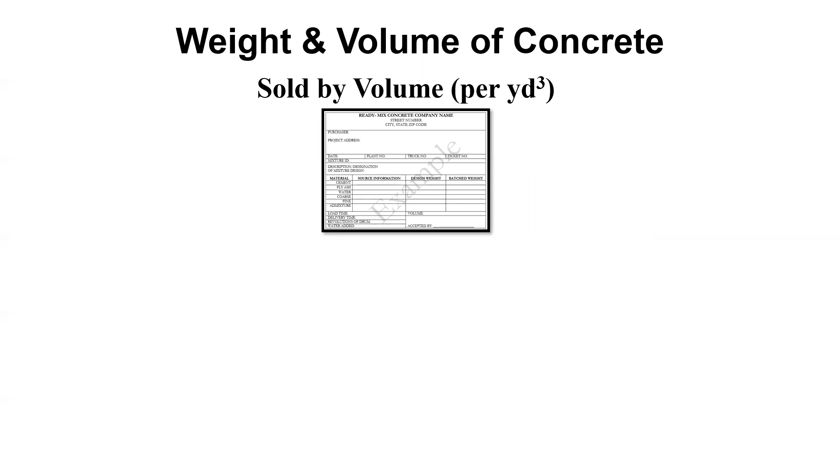Well, you got to remember, concrete is sold by volume. When you estimate in your estimating class, a lot of you are in Dr. Yates's estimating class, so you're estimating concrete by volume, cubic yard. So contractors, whenever you're going out and building something, you're going to figure out how much volume it is to fill up in your forms. So the concrete truck comes out, it's a certain volume, pour it out.

Well, whenever that ready mix truck, though, it's batched sometimes by weight. Some of the liquids are usually batched by volume, though. So they have to do a little conversion back and forth just to get the weights right. But at the same time, you got to figure out when you're batching stuff by the weight, what's the volume? Because your end goal is you want

to have enough to yield for your volume that you're looking for. So if you have a 10-yard truck, you want to make sure you have 10 yards you're selling that customer, not 10 1/4, not 9 1/4. You want 10 yards. And so what you do whenever you're designing a mix is you start off by saying, okay, we're going to design based off 1 cubic yard. And then if we want to make it into 10 yards for a 10-yard truck or 8-yard truck, then we can just times that by 10 yards or 8 yards, depending on what you want.

And so if we're doing trial batching, when it's 1 cubic yard, we can even convert it into 27 cubic feet and then take it down to maybe 2 cubic foot whenever you do trial batches at the lab. We'll go through some of that too. So there's some math that starts getting involved with designing. It's sold by volume, it's batched by weight or volume, and then usually you want to design it by volume, but you have to have both the batch weights and the actual volume for your design.

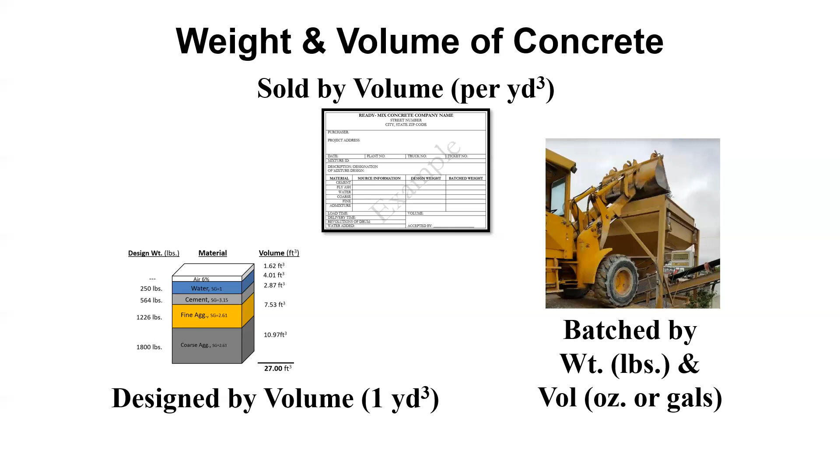But your goal is you're trying to design 27 cubic feet or 1 yard. So like I talked about, think about a 3 foot by 3 foot by 3 foot box. That equals 27 cubic feet, 3 times 3 times 3. And then that's 1 yard.

So in that 3 foot by 3 foot by 3 foot box, we're going to figure out how much aggregate, how much coarse sand or coarse aggregate, how much fine aggregate, how much water, how much cement, and how much air all gets put in that little box. So that's what our goal is when we're designing. We're trying to figure out how much to fill up that box with.

So if we're trying to figure out the volume, and we know our batch weights, and we know the specific gravity of the material, and we know the unit weight of water, 62.4, then we can convert, we can know the volume. And we can also do basic algebra, take this denominator here, move it over there if we want to figure out if you know the volume, to figure out our batch weight. So, I mean, you can do basic algebra that you learned in probably the 8th, 9th grade to go back and forth.

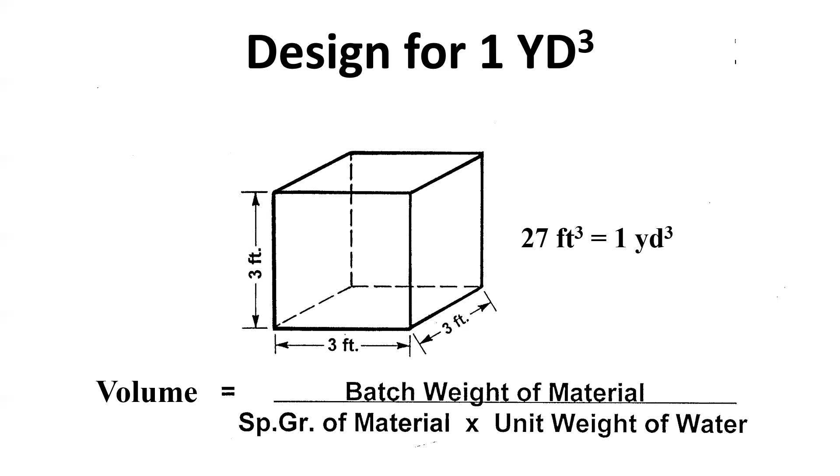So we're trying to fill our box. If you remember specific gravity like we talked about right before class, it is a comparison of density. If you have the weight at the same volume, and you compare the weight of water to the weight of stone, how they get 2.7 is the ratio. 270 pounds of stone divided by 100 pounds of water is 2.7. That's how they get that. You get the unit weight by just putting the material in a known volume and weighing it, so pounds per cubic foot.

Absorption, we've run absorption, we've run unit weight in the lab, or at least talked about it, and tried to figure out absorption at SSD. So whenever the voids are fully saturated, but there's no free water, so there's nothing on the surface.

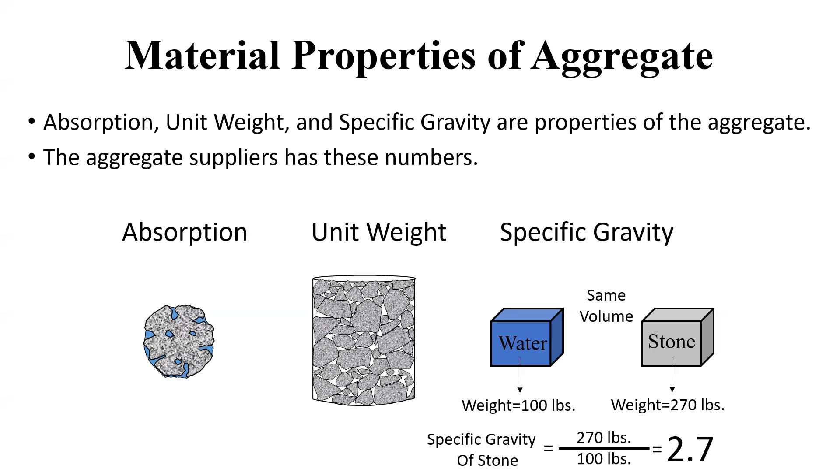So let's go through a basic example on the board or on the PowerPoint. How many cubic feet will 5 bags of Portland cement occupy in our little box here? 470 pounds divided by 196.56 is 2.39. I probably should have put this a little better, but what is the specific gravity of cement?

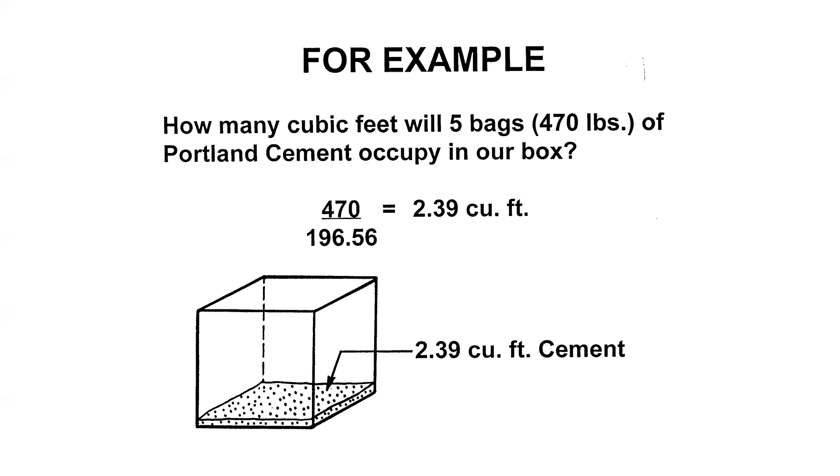It is 3.15. So 3.15 times 62.4 is 196.56. That's how they get the bottom number. The top one is just given. So you do that together, and that equals 2.39 cubic feet.

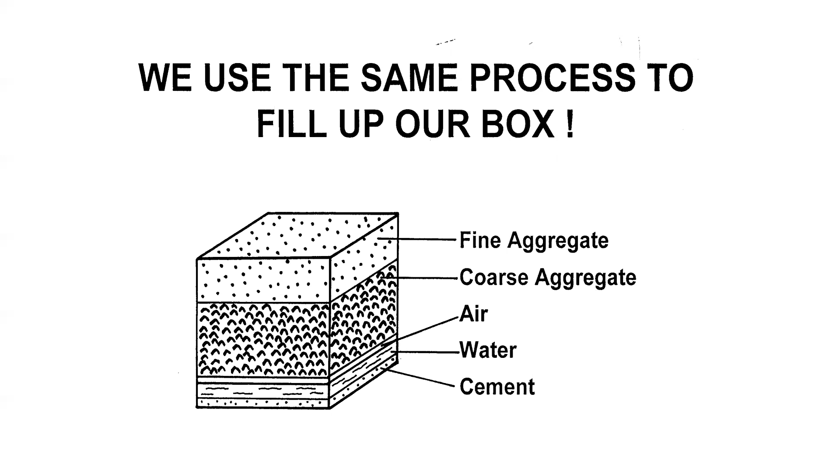So you do the same thing through the process, except for air, and we'll talk about air here in a minute. But you figure out what your specific gravities are for each of your materials, and if you know your weights, you can convert to a volume.

So if this is our example, you have the graph or the worksheet in front of you for people online. This is the worksheet that I think I have attached in the lesson. We have our weights, so we have a given weight of cement and the specific gravities of it, and it goes all the way down. So if you fill out your boxes from that worksheet, weights are on top, on the numerator, and the specific gravities are on the denominator on that box.

Okay, so wait for a second while you fill it all out. And then when we get to air, it is 6%, and it's times 27.

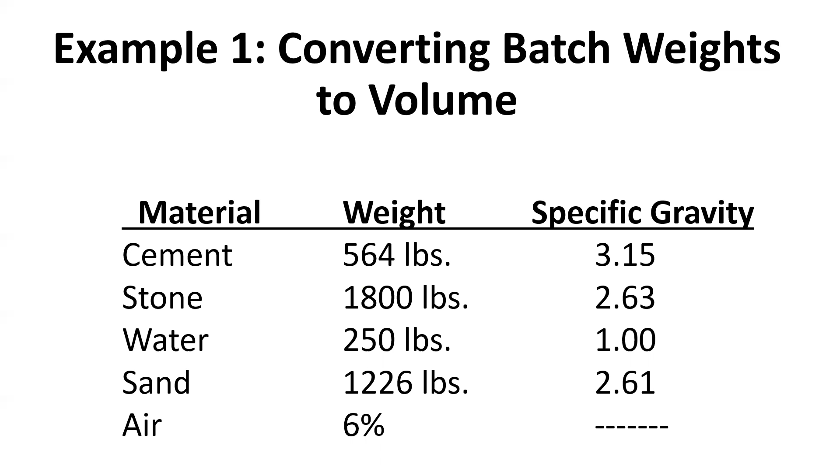I'm going to look to the next one, which is the worksheet already filled out. So we should have—people do math a little differently. You may want to do the denominator first, the thing on the bottom of the fraction. So 3.15 times 62.4, which equals 196.4 or something like that, and then you take 564 divided by that.

So there's different ways. You may have a calculator that does the parentheses for you, so you can type in 564 divided by parentheses 3.15 times 62.4. A good way to check to make sure you don't mess up is all your numbers should be below 27 cubic feet. If you have something above 27 cubic feet, you probably did something wrong, okay?

So you can do the same thing for your stone, 1800 divided by—you can put parentheses. Most of us have a smart calculator. I mean, this is basic 5th grade math that you should have learned in 5th, 6th grade. So it's not complicated. The complicated part is remembering everything—there's a lot of little details that we're going to get into.

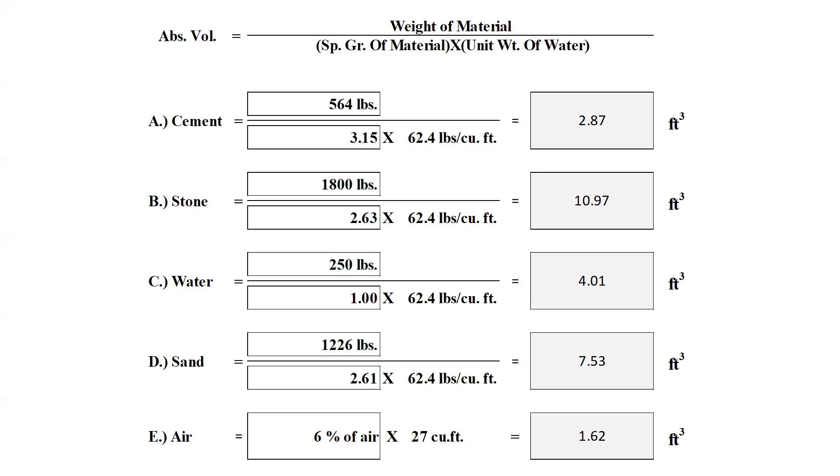But again, basic equation up there, you run through the steps, and so you have all this here. This whole entire column better equal 27. So if you add up each of these, it's going to equal 27. If it doesn't, you did something wrong. Okay? So it should equal 27.00.

Maybe it's not 00, but it's pretty close, 0.0 something. Sometimes when I do it, rounding errors can mess things up, so it's not unheard of to have 27.01 or 26.99. Don't get too caught up in that. You made a mistake if it's 27.1 though, okay? There's something wrong, or your mix is over yielding or under yielding if you're off by 0.1 cubic feet.

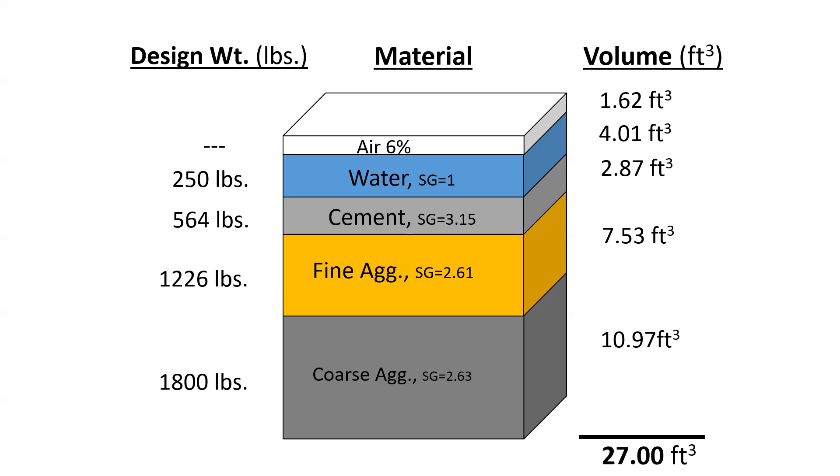So that's kind of when you look at a batch ticket and you have your batch weights on the left-hand side, the specific gravities, and then you have your volumes. So if we have a 3 by 3 by 3, again this isn't perfect to scale, but I think we can all understand how much material fits in that box to make 3 times 3 times 3, so 27 cubic feet, so 1 yard. That's kind of the basic math behind it.

So today we're going to talk about ACI 211 mix design method. And I don't know if I got to it in the last PowerPoint.

Maybe I should have added a couple slides, but who in here eats steak? Do we all prefer medium well steak or well done steak, or probably every single person in here likes a different degree of pink. Some of you like it burnt because it's good for your teeth. Some people like it where it's as bleeding as possible, where they barely even put it on the grill and just flipped it a couple times just to make the little marks. And some people are happy with that.

Well, there's different degrees, and in the real world, after you get out of the classroom, it's kind of how mixed designs sometimes are, where people prefer one mixed design method to another. So with ACI 211, some people on the committee follow this very strictly. I also know people, like me, that use other mixed design methods that work a lot better for me and that a lot of other people prefer too. I get emails from people from Australia, South Africa, Europe, and different places that prefer the mixed design method I've been working on. So people just prefer different things.

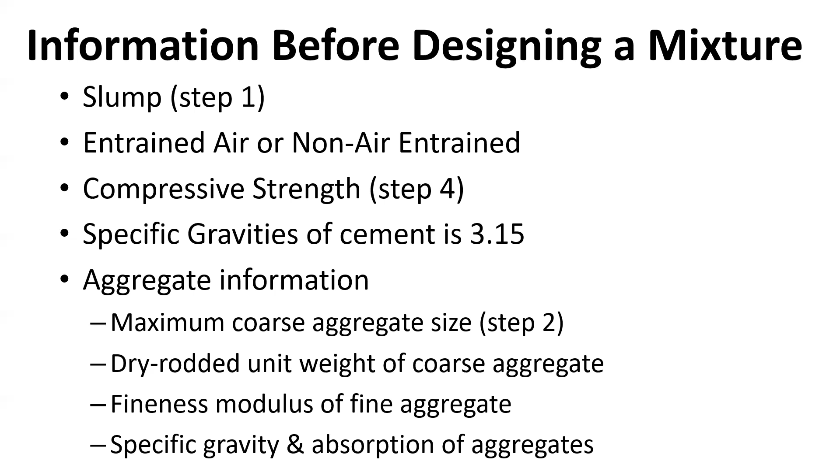And that's just aggregate information. So the different testing behind it, we kind of went over, or we did in class. So that information is a lot of times given to you, but it's important to know what it is.

So workability at a 3 or 4-inch slump was really generated by the amount of cement and water that were added to the mix. And a lot of times people focused on the amount of water. So engineers really wanted to limit the amount of water you had in your mix.

But today, when we do a floor slab, a lot of times you're at a 5-inch slump, not a 3-inch slump. If you do residential work, it's almost self-consolidating. They want an 8, 9, 10-inch slump. They don't always want to pay for an 8, 9, 10-inch slump, but that's what they want. They want it to flow like water.

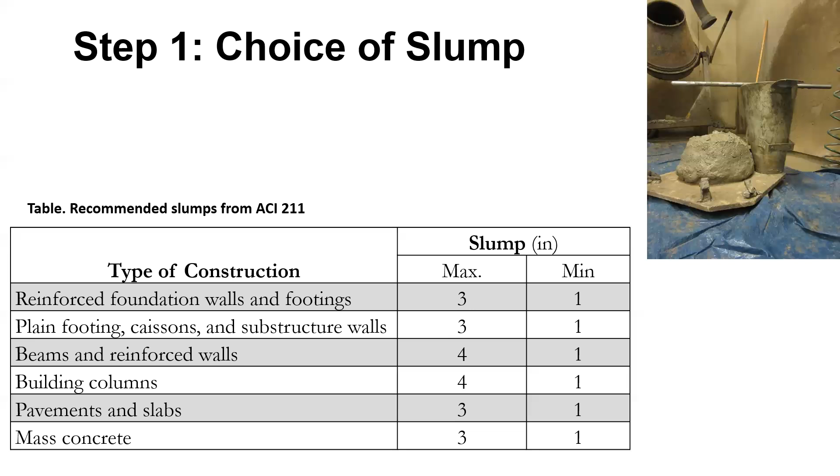Oh, you ran slump in the lab. You measured a 3 or 4-inch slump. That's not water. So, you know, and beams is the same way, a 4-inch slump. The minimum's a 1-inch slump. So there's kind of a range, but that's just the recommended table.

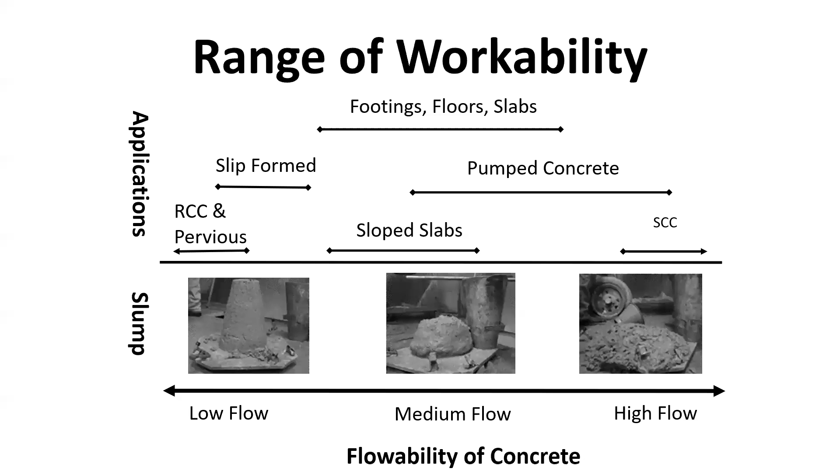We'll talk here in a minute. I'll show you another table where some of this kind of puts together where we actually start selecting water and stuff from it. You can kind of go with other ranges. That's just what they recommended from back in the day. And you can kind of pick your own slump depending on what application you're in.

So step 2, after you figure out what slump you have, and you write that on your piece of paper, the next step is figuring out your maximum size of your coarse aggregate. So there's 3 big criteria for your maximum. Nominal maximum is what we're going to use in this class, okay? Not the maximum size, but they use it interchangeably.

Nominal maximum size. So it's either going to be 57 or 67 stone we're going to use. So either a 1-inch for 57 or a 3/4 inch for 67.

And then the largest nominal maximum size shouldn't be more than 1/5 the minimum dimension of any concrete element. So whenever we're looking at a different concrete element, the dimensions, if it's a 5-inch thick wall, then 5 divided by 5. So you don't want any more than 1 inch.

For a floor slab, say it's a 6-inch floor slab, so 6 divided by 3 is 2 inches. So most concrete placed in the United States, I would probably guess at least 80% is 4-inch slab. So Ethan, you have a calculator in front of you. What's 4 divided by 3? 1.3. So you can get away with using a 57 stone, not a 467 stone, but a 57 stone, with a 4-inch slump or a 4-inch thickness.

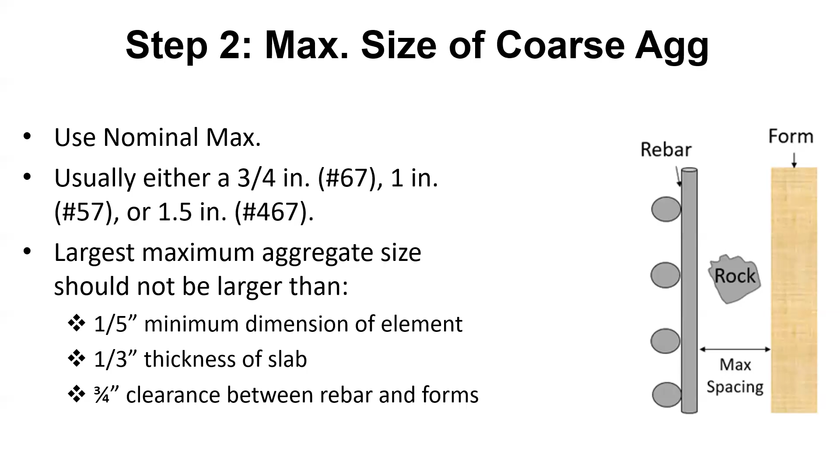So how, like I said, if you didn't realize, if you forgot, I know you have slept, there's been an exam, some of you are like, all right, I can forget all that material. You forgot. So for a 57 stone, 1-inch nominal maximum size, for 67, it's 3/4 of an inch.

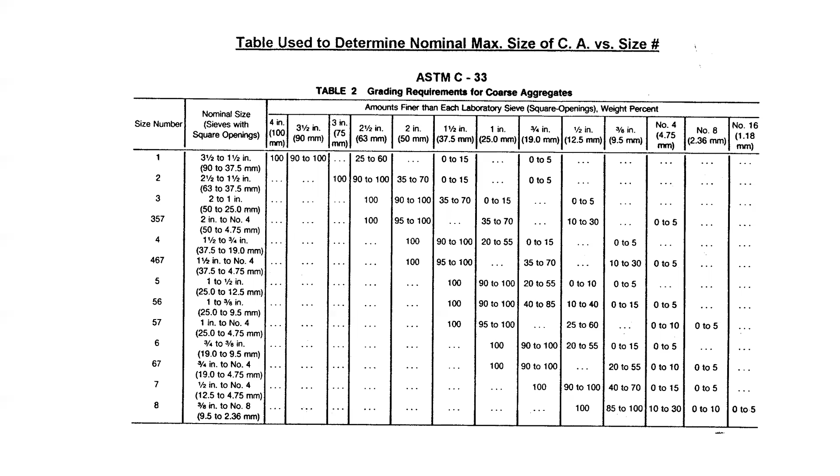So step 3, after you figured out your slump and your nominal maximum aggregate size to use—which again, a lot of times might be given to you—you're going to determine the water and air content.

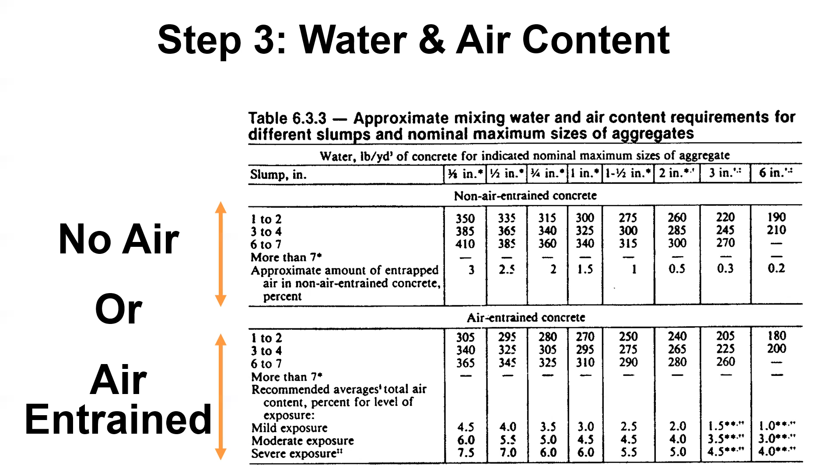I talked about how to design and get better numbers than this, with the durability specifications for concrete. So I don't really recommend using this table, and most of this entrained air I'm going to give to you. So you're going to assume usually a 1.5—that's usually a pretty good number, but I'll probably give that to you.

So step number 4, then you've got to figure out your water cement ratio—again, air entrained and non-air entrained concrete. Where are we at, and what was the compressive strength? So if you're at 3,000 PSI, no air, it's 0.68. If you're at 3,500, it's going to be in between these two numbers.

The next step, after you figure out your water to cement ratio, you can start putting stuff together. We just determined our water content—295 pounds for a 1 inch nominal maximum size with a 4 inch slump, or 325 for a 4 inch slump with no air entrain. You can take that number, your weight of water, divided by the water cement ratio. We talked about 3,000 PSI having a 0.68 water cement ratio.

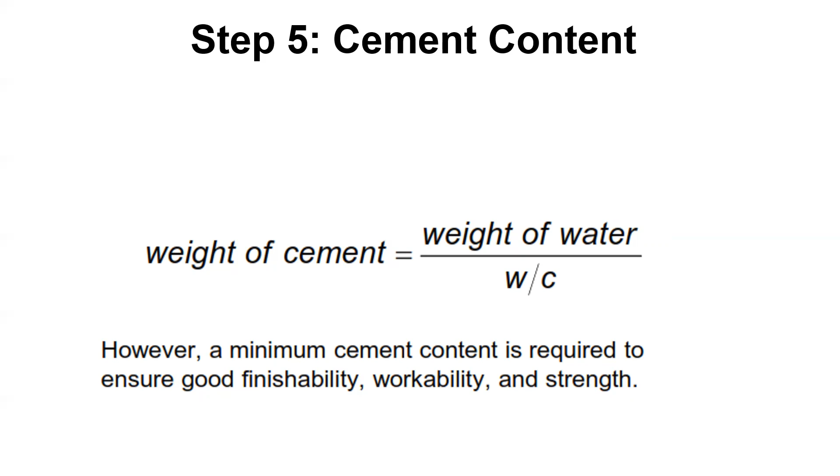Again, this isn't for durability, this is just for strength—it's really important to realize that. Obviously, durability requirements may want something much lower than a 0.68. But this is the ACI 211 mix design method, which is what I'm teaching today.

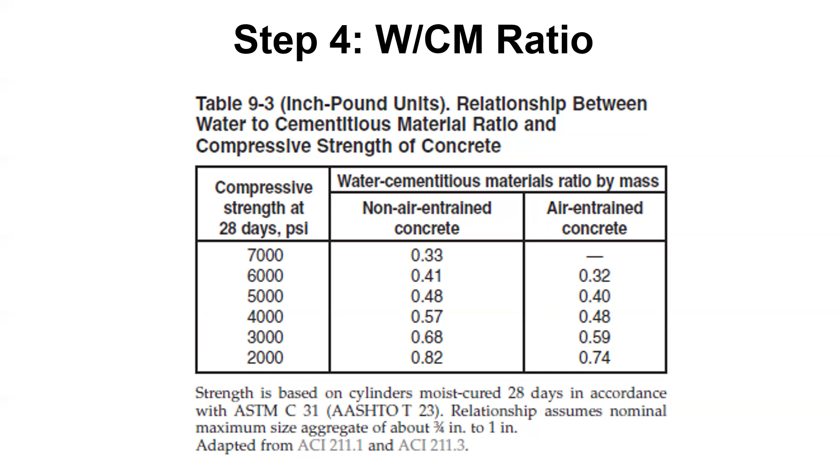So now we're at the aggregates—how we get our rock, how we get our sand. Step 6, you use either one of these tables. This is the figure, this is the table—they're the same thing, one's just visual, one's tabular with just numbers. Some people prefer one or the other, but it truly doesn't matter, just use one of them.

But both of them have the same thing: they have a nominal maximum size—here it's in metric, and here it's in inches. And then you have a bulk volume of dry rodded coarse aggregate per unit volume of concrete, for different fineness moduluses.

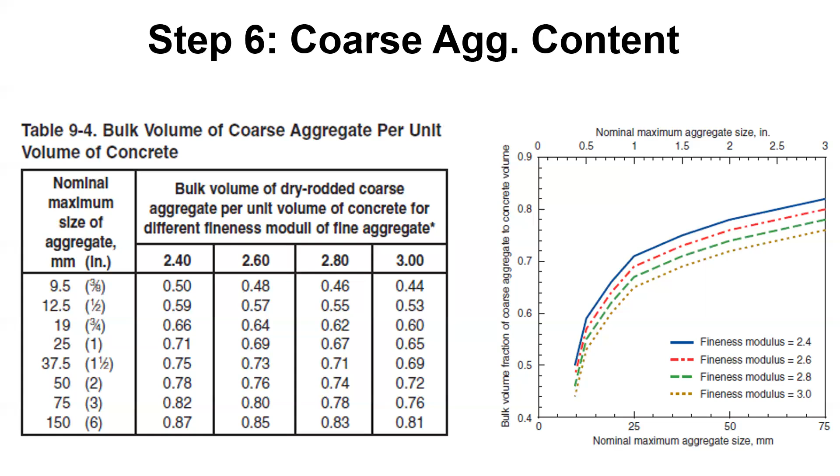Okay, then what do you do with that number, that bulk volume number? Well, what you do is, again, it's the volume percentage of your coarse aggregate. So if the whole thing was filled up,

dry rodded unit weight, pounds per cubic foot, we can figure out how much needs to actually be in that. So pounds per cubic foot, well, this is in pounds per cubic foot, so we need to times it by 27 to convert it to a cubic yard.

And then we can take it and say this is how much percent of coarse aggregate that we're going to have. So if it was 0.69, then it would be 0.69 times maybe 110 pounds times 27, and that would give us our amount of coarse aggregate. Again, this is just an example, 1,800 pounds of rock, and then you can convert that.

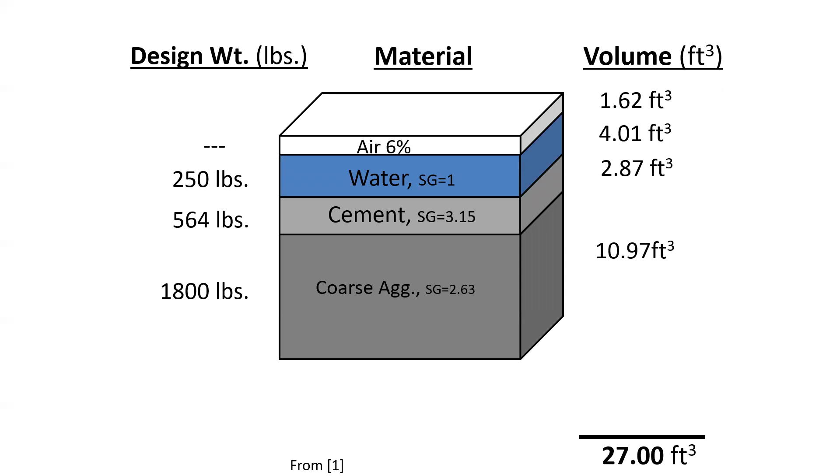You can take that, so you can convert that to your actual volume too.

So how do you get sand now? Well, believe it or not, they say sand's a filler. So it just needs to fill the rest of the volume up. So they just add up all this.

Then they take 27 minus that. So the top equation here, 27 minus that total volume equals the volume of fine aggregate you have.

Then you take that fine aggregate number right here, times specific gravity, times 62.4, and that'll get you your weight of your fine aggregate.

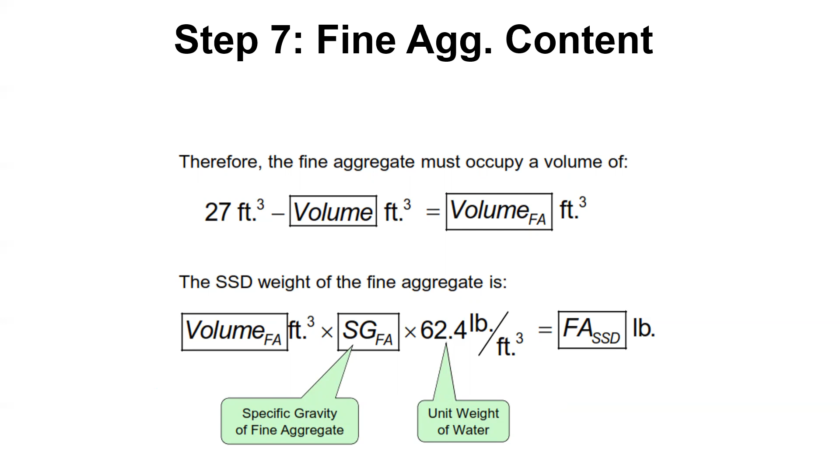So we took our volume of our fine aggregate, which we got up here. And so we just took our specific gravity and our unit weight, the denominator, we moved it up here. And we just multiplied all three to get the weight of the actual material. So just basic algebra. And that's how you get that number.

So then step 8, you adjust for moistures. So again, you want to be at SSD. That's what we design at. Whenever they wrote the standard, they actually talked about being completely dry.

That's actually incorrect. Even some of the numbers they use, if they're using specific gravity at SSD, then they should be here, not there. So if you use specific gravity at dry, it'd be over there, but that's not. Anyways, we're going to change it. We'll use specific gravity at SSD.

So we want to figure out how wet our rock is. We've done this in our lab. I showed you a video how to do absorption. So absorption is at SSD, how much water gets absorbed in the rock. We also figured out how much moisture content altogether.

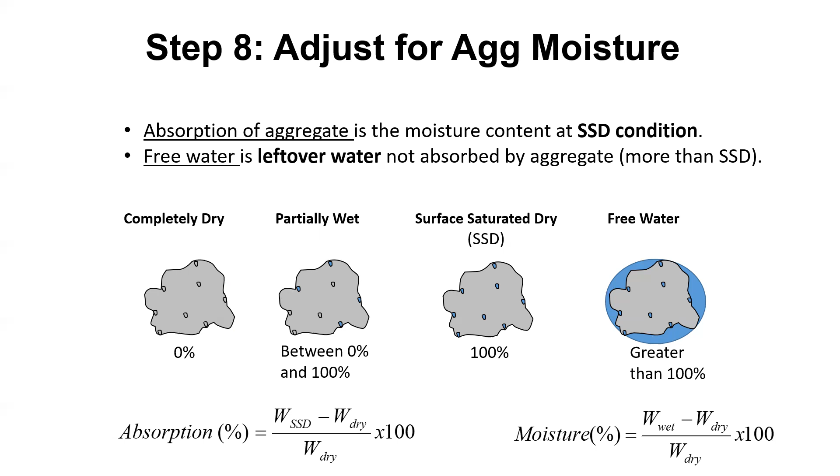So if you want to do math to figure out your adjusted moisture, if you batch 1,830 pounds of rock, so that's what this number is. And you have an absorption of 0.5, moisture content of 2.19, so 2.19 minus the 0.5 gets you this right here. 2.19 minus 0.5 will get you this number.

Whenever you calculate that 1.69 and figure out how much water is actually in this, it's about 30 pounds. So it's about 1,800 pounds of rock and 30 pounds of water when you go to batch. With that mix design example, where you have 1,800 pounds of rock, you actually need to batch an extra 30 pounds to compensate for that water.

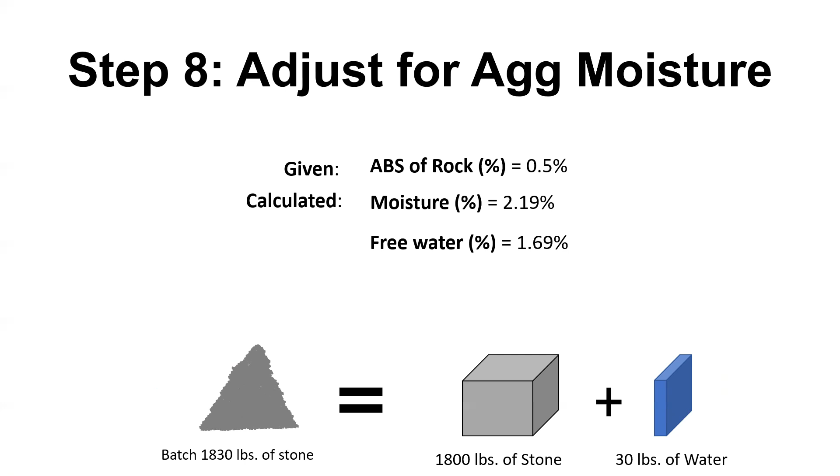I'll go through in much more detail about how to compensate the entire mix design, including the water, on a different day. Then you trial batch. It may look great on paper, but that's not what the specs called for — that's a 0-inch slump, not a 5-inch slump like I asked for.

You can also go out and test it. We can do this in the lab and test all those things well before it goes on the job site. So a lot of times we do trial batches — people even get a ready mix truck out and batch a yard or 4 yards, and they'll see how well it works.

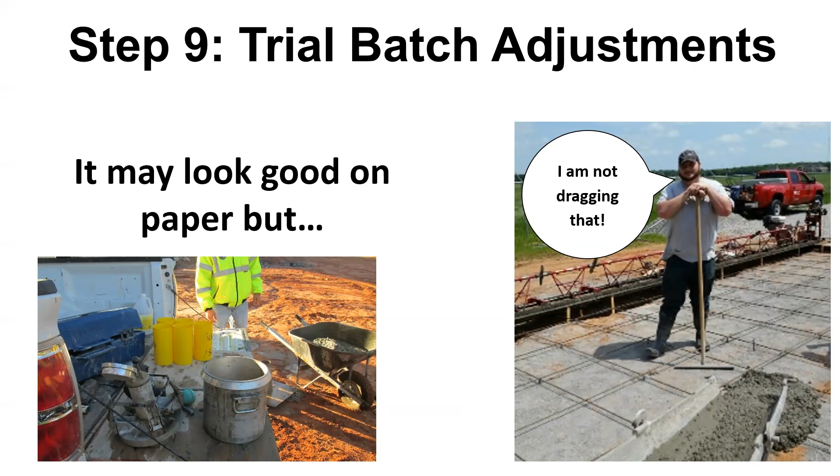So those are the 9 different steps. Figure out your slump, write it down, and your maximum coarse aggregate size, write it down. Then from there you can take those 2 and figure out your water content. You can figure out your air content on that table too, or it can just be given to you.

After you figure out your water content, you can take your strength number and figure out what water-cement ratio you need to be at. Then you take the water-cement ratio and back-calculate it to figure out your cement content — water divided by cement, weight of water divided by weight of cement. You divide the weight of your water by the water-cement ratio to get your cement content. It's basic algebra to get there.

That may have sounded a little confusing, but if you look back at it: weight of your water divided by your water-cement ratio gives you cement. Basic algebra. For step 6, you go through and either use the table or use the figure to get a bulk volume.

That bulk volume is a percentage of the volume of rock you're going to use. You'll use the nominal maximum versus the fineness modulus, or use the graph with the nominal maximum versus the different graph curves, to figure out your coarse content. Then you take that bulk volume number times your unit weight times 27, and that gets you your coarse aggregate content.